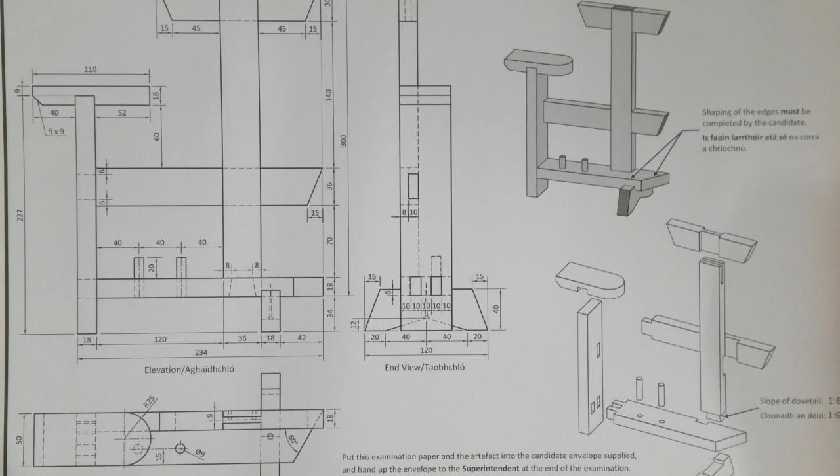Right, so this is the 2023 practical, day 1. You have all your pieces cut out to the spec given by the department. So when you're in the exam, the first thing you need to do is look at your drawing and figure out what's what. What I usually do is label my components: A, B, C, D, E, F, G. Now it's a case of trying to match up your components with the spec from the department.

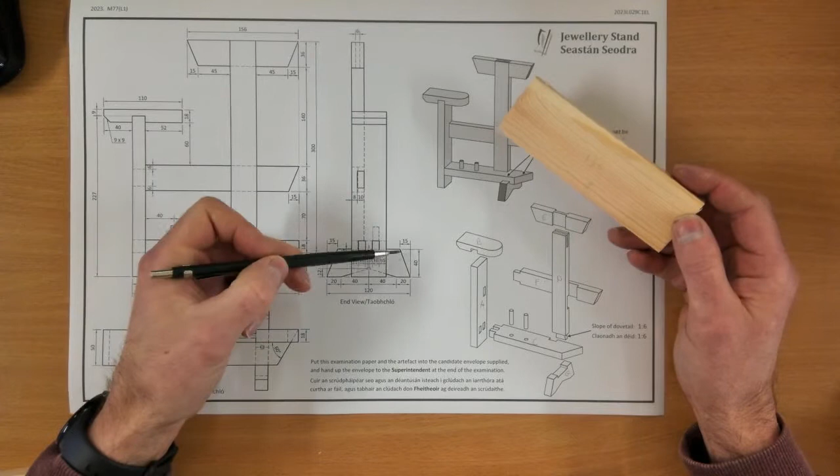So I've got all my pieces. I'm looking at this piece. I've measured and written down what it is - it's 130 wide. I look along my drawing. I know there's 10 mil extra on this than what's on the drawing. Here I've got a piece that's 120 by 40, and this piece is 130 by 40. So that is that bottom piece - I've labeled it G on my drawing, so I'm going to label that G.

That goes to the side. Next piece I'm looking at, I'm going to find this C piece because it sits on top. I know it's as wide as this piece, which means it's 50 wide. So I look at my two pieces that are 50 wide. According to the drawing, this is 234. I've got a piece that's 50 by 245 - I have an extra 10 mil, so this must be it. That's part C, I'll sit it there.

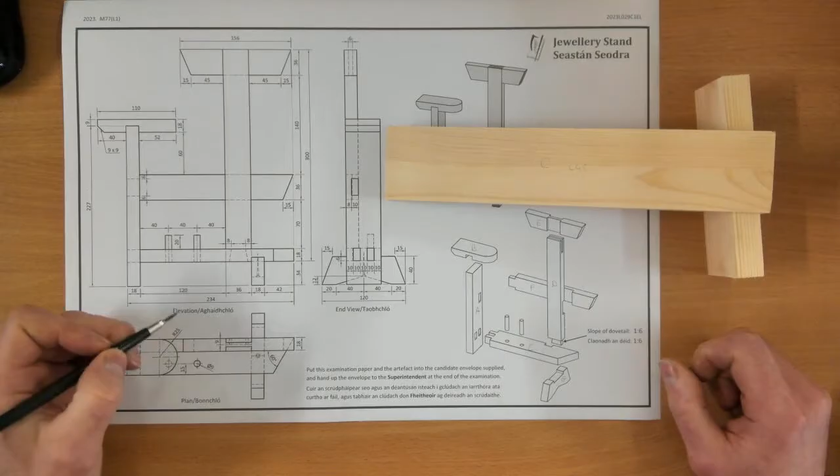I'm looking for A and B now. According to the drawing, A is 227. B is as wide as A, so it's 50 wide. I've only got one piece left that's 50. That means the very long piece I have is going to have to get chopped at some point, and it's going to give me A and B. So that's A plus B - put it to the side.

I've got 3 pieces left. I've got one here that's 245 long, so I'm looking for something around 235. Here I've got this piece, 234 - that must be that one. I've labeled that F, so this is F.

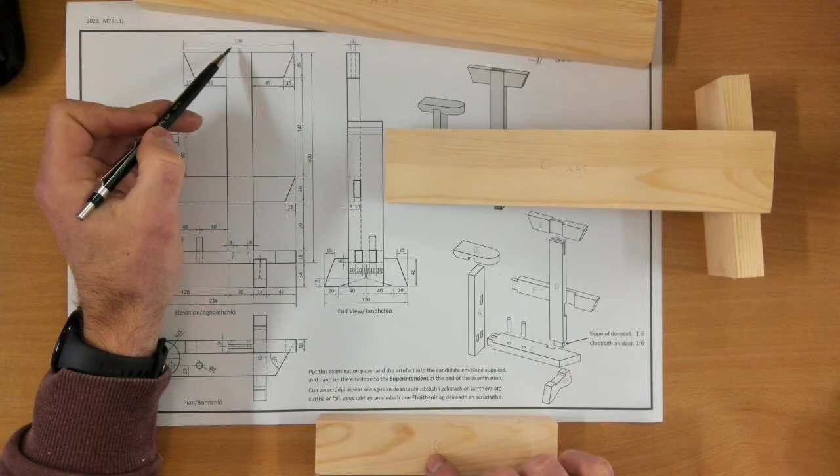2 left. I've got a top piece, 36 wide. This is 36, it's 165 - I'm looking for 156, so that'll do. That's part E. Then I've got a big tall piece that's 310 long. This fella is 300, so that must be that one - that's part D.

So you can set them up on the table in the position they'll be going in - it'll look like that. So I've got all my pieces, I'm pretty sure that's the way it goes together, and I've labeled them correctly. It's a case of picking one now and tackling that.

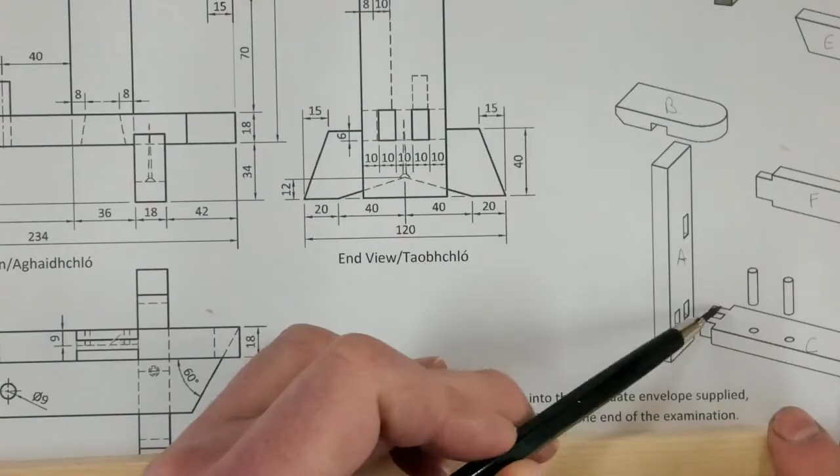I'm going to look at the 50 mil wide pieces first, get them out of the way. So I'm going to say part C. This fella is the elevation, and you can see the plan of it. I know there's going to be 2 mortise tenons, a twin mortise tenon, 2 dowels, dovetail halving, and a slope coming off the end there at 60 degrees according to this.

Because I know there's 10 millimeters extra, I can have 5 millimeters of waste from each side. I'm happy enough that this is a nice clean piece with no knots. I'm going to come in my 5 millimeters - that's going to be waste. I'm going to bring 0 to there, and mark in my depths.

So looking at my drawing, from the end here, I've got the thickness of this piece, which is 18 mil. So with a sharp pencil now, I'm marking my 18 mil. From there, I've got two dowels, so 40, 40, and then 40.

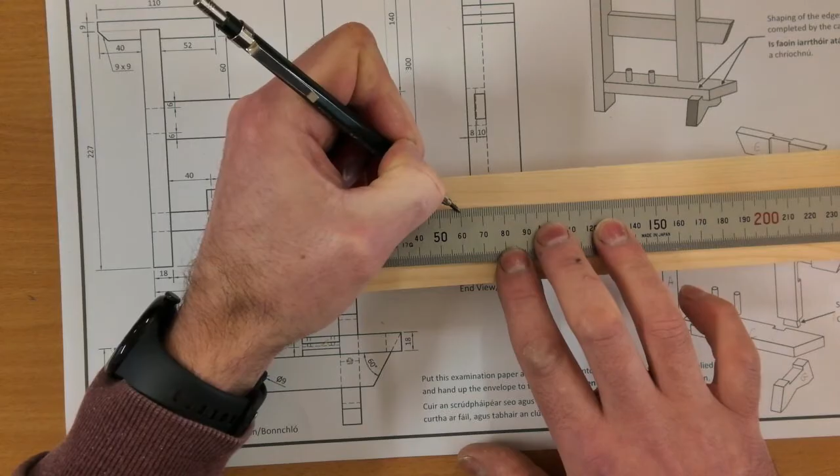From there, I don't want to move 0 on my ruler because, well, you could, but you might run the risk of not being as accurate. So I'm going to count 10, 20, 30, 40, and then come back 2 - that's 40. I'll go back to my 60, I know I have to take off 2. So 10, 20, 30, 40, come back 2. And then 10, 20, 30, 40, come back 2. That brings me to this point here.

I'm going to ignore the 8 and the 8 for a minute - ignore that and that for the moment. Thickness of this fella is 36. So I'm actually just going to move the ruler this time, make sure I'm nice and accurate and everything lines up accordingly. I'm going to measure 36.

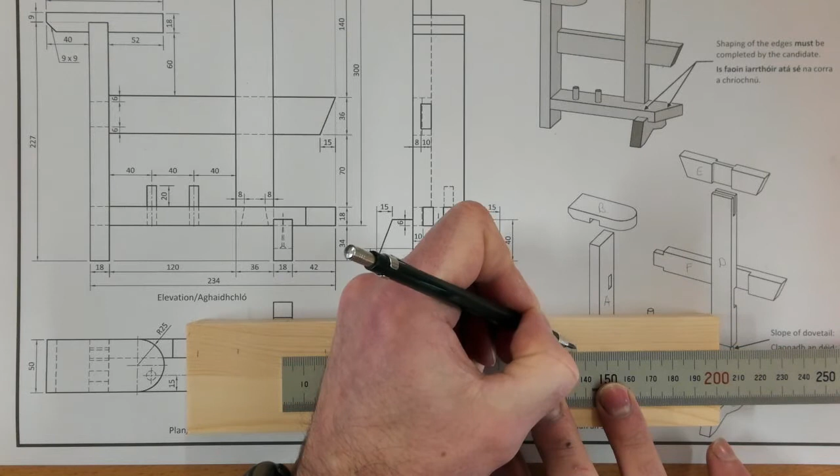Okay, then I've got the position of that base going to sit in there. That's 18 mil. Look, it'll just be easier to move the ruler, but make sure everything's sharp pencil and accurate. 18 mil. Okay, and then after the 18, I should have 42 left over and then an extra 5 mil of waste.

So 42, 10, 20, 30, 40, 42, and then I've got my 5 mil left over at the end. So I'm happy enough that I've got 5 mil at each end. If it turned out that I didn't have 5 mil at each end, It means you've made a mistake somewhere. So I'm going to square those lines around.

Now for the dowel ones here, I only really need them on the face, so I won't be squaring those ones. But the others, I will be squaring. Now as I run out of room here, I flip the tri-square so that there's a maximum amount of surface area for the tri-square.

Let's skip those two.

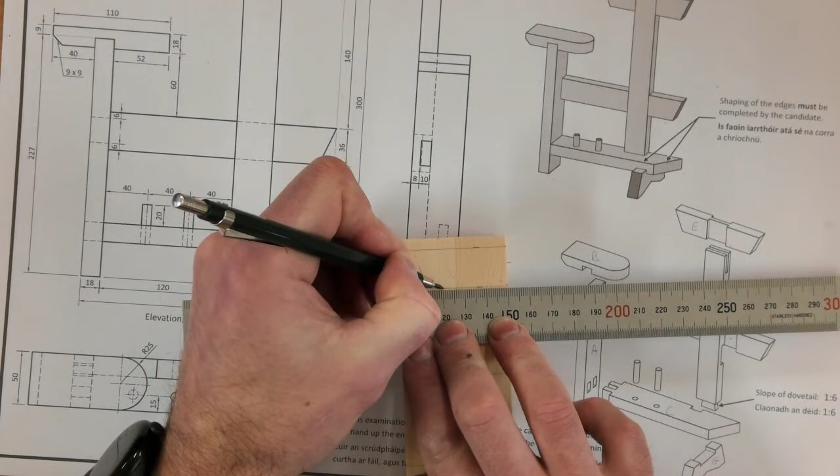If I look at the drawing here, this is the end view. This is looking in from the back, so this is the back, this is the front. It's 10 mils, so 1, 2, 3, 4, 5 tens. So I will mark my piece is 50, 10, 20, 30, 40.

So I'm going to use the marking gauge or the mortise gauge to mark those fellas, so I'm going to leave them alone for a minute.

I'll come to the slopey bit at the front, 60 degrees. So I get my sliding bevel, I get my 60-degree set square, get it at 60 degrees, tighten it, and then double check it's actually 60 degrees. Tighten it up.

And it's going from the back corner, so not the very edge, but it's in the waist, which is the back corner. Mark that fella here, and when I bring it around to mark the back, I'll just flip it like that before I turn it around so I don't mark the wrong side.

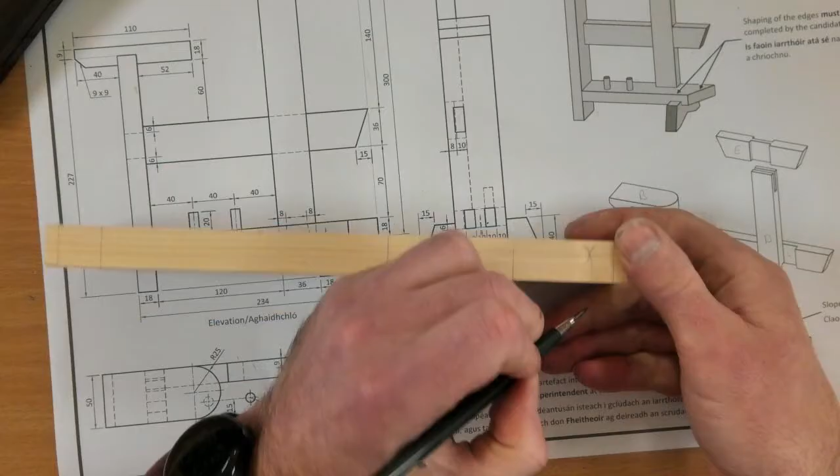I'll put an X there, X, X, X, X, and I can bring that line across to know that that's where it finishes.

Got the dovetail at the back. I know that was 18 on the top side. So this is the top surface, that's the bottom. So on the top, it's in here between the two 36 lines. So I'm measuring my 8 there. So nice and accurately, that's 18 here. And that's 10 to go back to, that's 8 there.

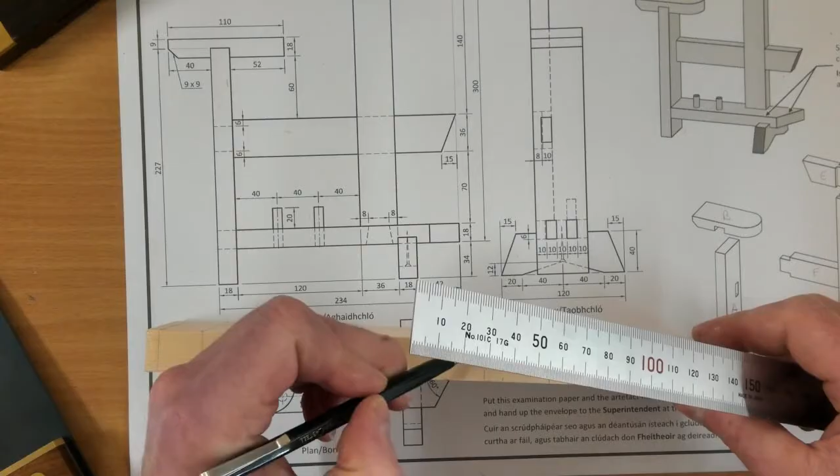Now, I'm not going to the edges because it says on the paper slopes of dovetail of 1 and 6. So when I'm marking part D, which is this guy, I'll come back to that and I'll mark that properly. So for the moment, I'm going to leave part C alone, come back later. I'll stick with the 50mm wide ones.

I'm going to go to A and B. Now, I've got a knot here, so I want to make sure I'm paying attention to that, I don't want to be trying to put those mortises through that knot. So I'll make sure that this end is part B, and ideally this area here maybe, or maybe this back section, yeah, maybe this back section instead.

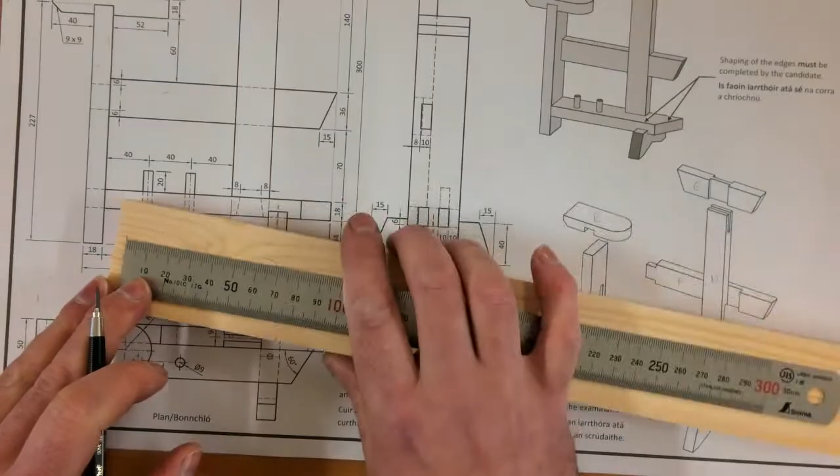So start with this. This is going to be B, this is going to be A. I want 5mm waist. That's my 5mm. I know that part B is 110mm in total, so I'll mark that. So my 0 is here in the 5mm, 110mm.

I'm going to, I should have an extra bit of waist, so I'm going to leave about 6mm of waist there. I should have a 10 I could leave there, but I'm just going to make it 6. So there's an X there, that's all waist.

I'm going to move 0 to that fella. So I've got 233 left. My length that I require is 227.

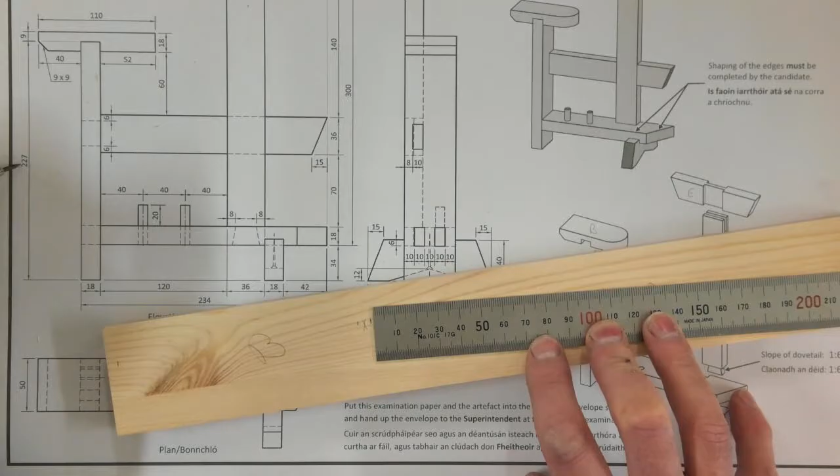From this point, 227, and that leaves me about 6mm waist here. So it's very important that you only leave 5 or 6mm here to account for the 5 or 6 at the very end. Part A.

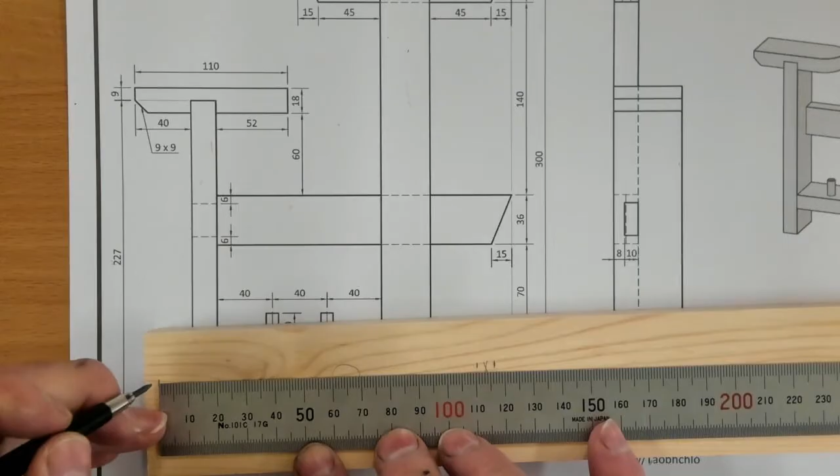Okay, back to part B. I know that it is 40, then the thickness is 18, and then 52. So 0 back down here to where my waist was. Make sure you're ending on 110.

I've got a 9x9 chamfer, so I can put that in now as well. But going back to the end, I've got 40, so still at 0. Measure my 40. Thickness is 18.

It's very important that you get that 18 spot on, because if you made it 19, well, when you do the housing joint that's here, it'll be loose. So make sure it's exactly 18. So that's 20, and come back 2 is 18.

And then from there, I'm going 52. So there's my 2. And then 10, 20, 30, 40, 50. That brings me to the end. So that's a handy enough one. Square those lines around.

I'm going to mark that chamfer on the bottom because it's on the underside here. So I'll bring a light line to the front. Let's bring the waist around.

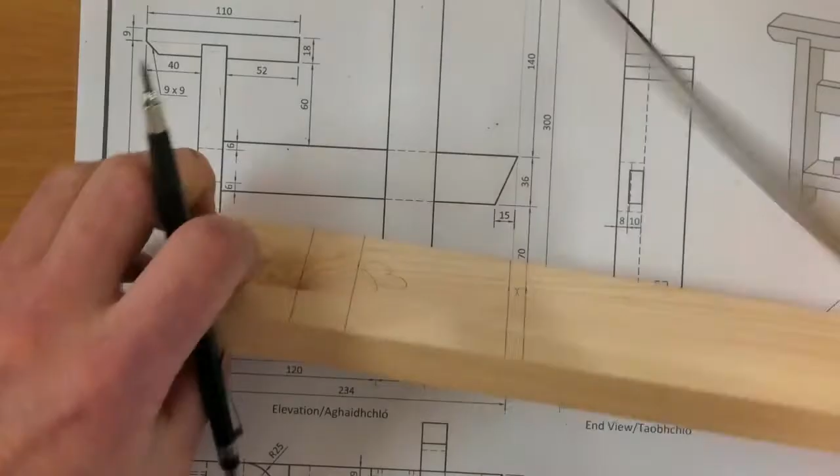And bring that line for the chamfer. You could mark your 9mm at the bottom, it doesn't matter. So I'm interested in that line, so that's the chamfer.

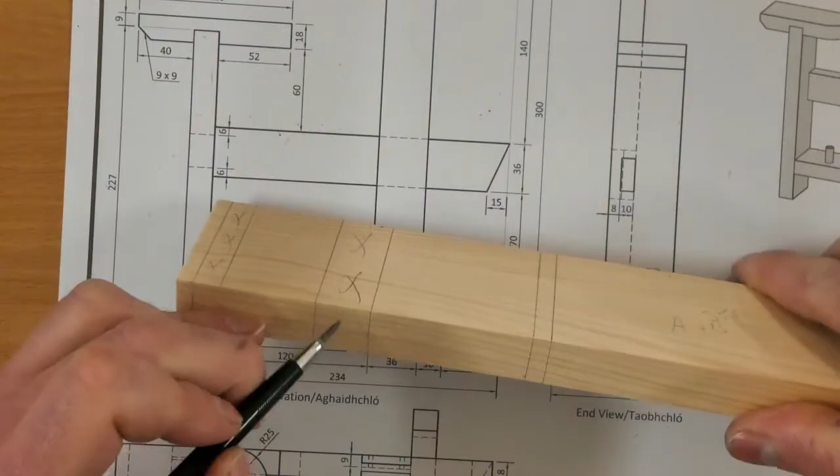My housing joint, is it? It'll be knocked off this. So I have a decision to make here now. I might keep that knot on the top or the bottom, but if I'm going to be processing this, I don't want it near the knot, so I'll make sure the knot is down, or the housing joint there is at the bottom. I'll have to mark a line here later with a gauge, but at least I know I'm taking the bottom off. This is all waste, so that's X's.

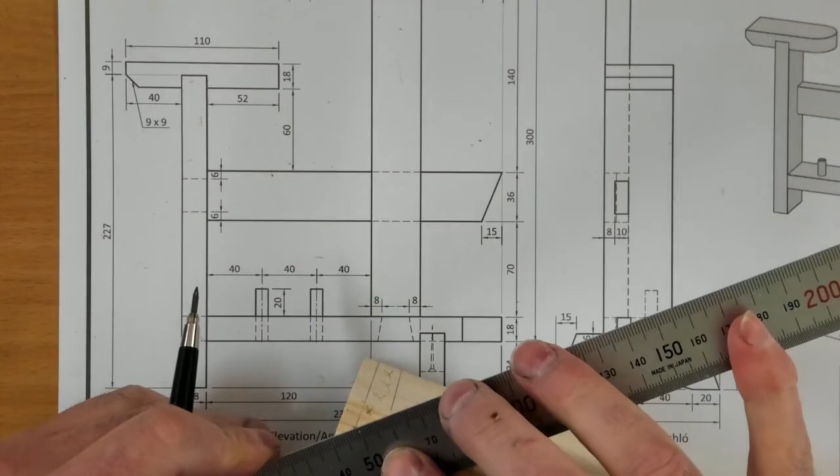And so it's going that way. This is the chamfer, on the underside, so if something happening there and there. Measure 9mm up. 9 is there. So I'll have a 45 degree here. So that'll be the chamfer coming off. Measuring 9mm in this way. So that's 9 there. I'll join my angle.

So that's part B. Enough done for the moment. I'll come back and mark the housing later. Part A.

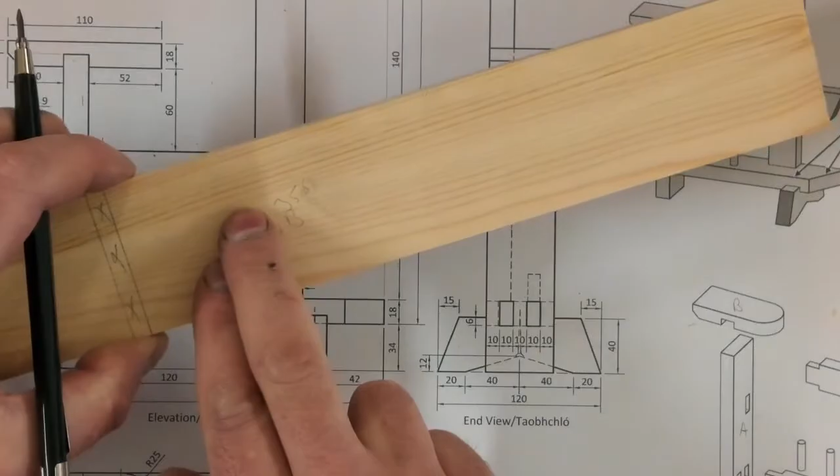Part A is the long one. I've got a double mortise here and then a mortise here. So I'd like to make the mortise here, and there's less of a chance of it splitting. You could put it at this end, that will give you more to hold, but I'll put it on this end.

Another decision you could make is, there's a nice clean saw cut here, and it might be worth leaving that as a saw cut from the machine, so that this is nice and clean to go into your housing joint up here. So I might ignore that mark I made earlier and measure from right to left, making that the very top. So this is the very top. That way I don't have to try and make this edge nice and clean later.

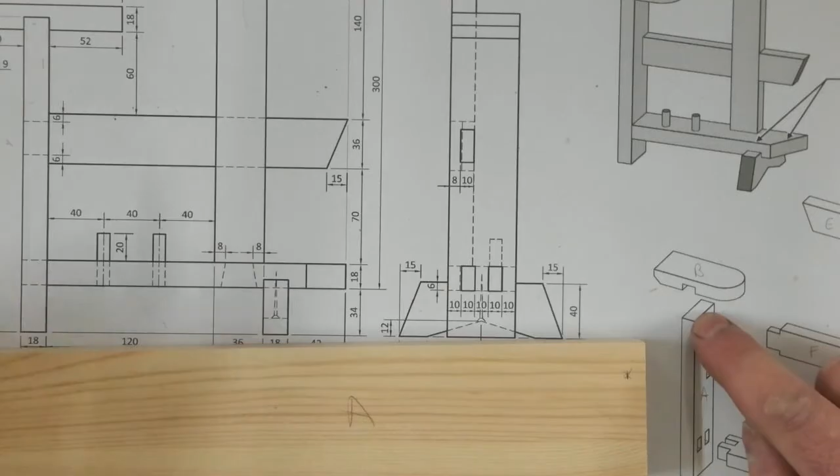Okay. So we'll mark that again. 227. This time I'm going to go from the very edge of the wood. So 227. All that means is this waste is going to be wider now.

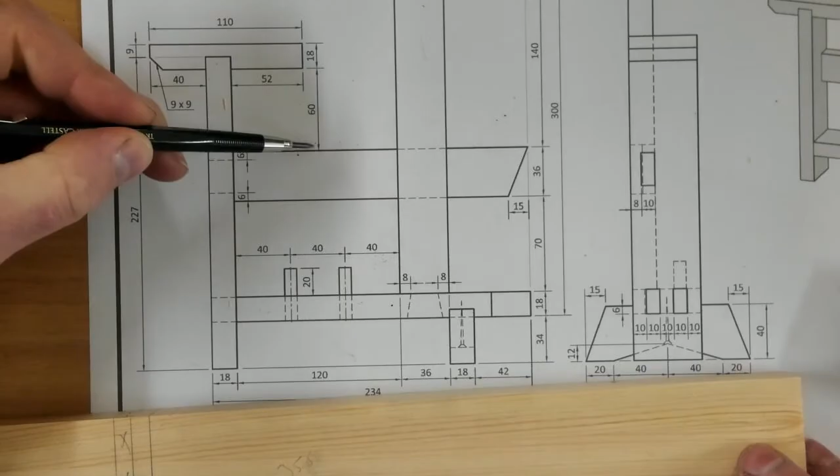Okay, so this is the top. There's your top. I need to come down to this point. It's 60 there, but I've got 9mm here.

I might be better off marking from the bottom up. So that's from the bottom up: 34, 18, 70, 36. So I said that this point is here now, is the bottom. So line it up. I'm going to say 34 plus 18. So 34, 18. Here, I'm just going to move instead of adding, and try to be as accurate as possible.

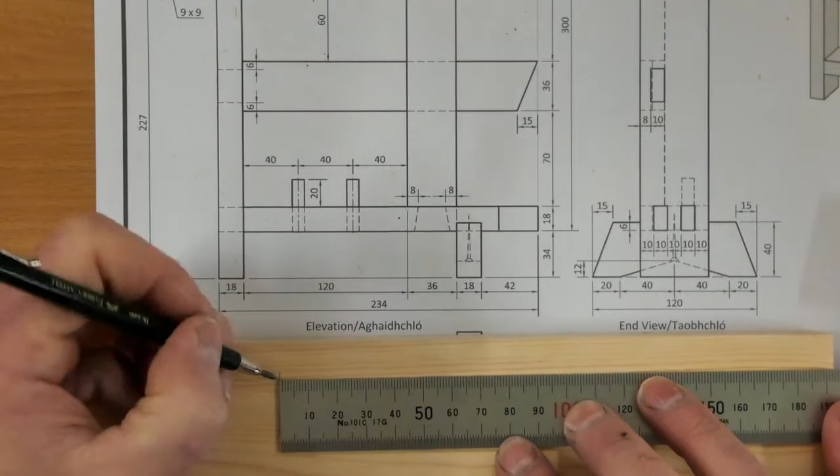18. After that, I got 70. 70. Then I've got 36 again: 10, 20, 30, and 6. I've got 60 plus halfway into this is 9. I should have 69 left over. I'll just double check that. Yes, I have 69 left over here, so I know that these are correct.

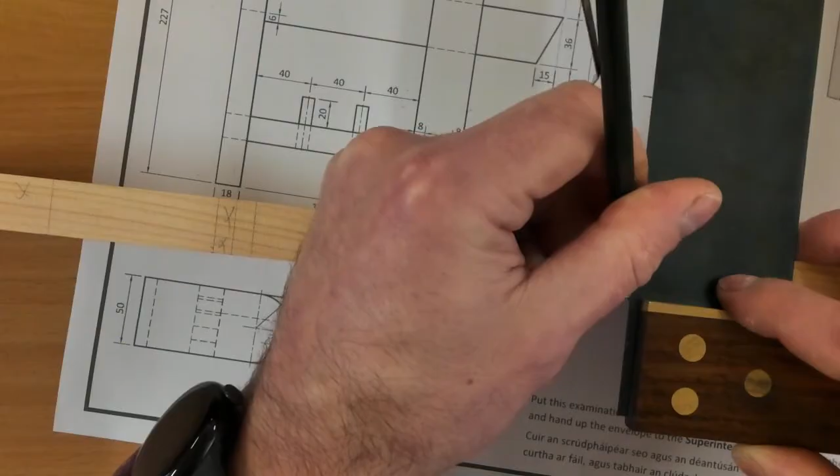Let's square those points around. Again, it's very important that your pencil is still sharp, because even if you're a mil or a half a mil out, it's going to cost you later on.

So my mortise is going to be down there. I could mark my tens here, but I'm going to use a gauge instead. So I'm just going to write in there 'mortise', so I don't forget it. After that gap, I've got my mortise up here. So that is 8 in and then 10.

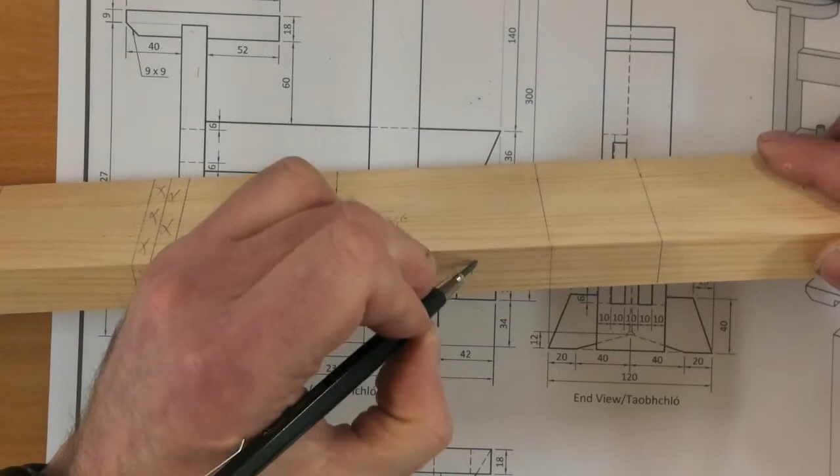I can mark that, but I have to decide which is my front and my back. So I'm going to say this is my front. Okay, so the front. That means this is the back, so I'll be measuring in here. So be nice and accurate from the back edge, which is here. I'm going to come in 8 and then 10, which is 18 in total. So I'm just going to put an X there, so that's my mortise, but I'll mark these with my gauge soon. And there's nothing happening up at the top, and that's a nice clean cut.

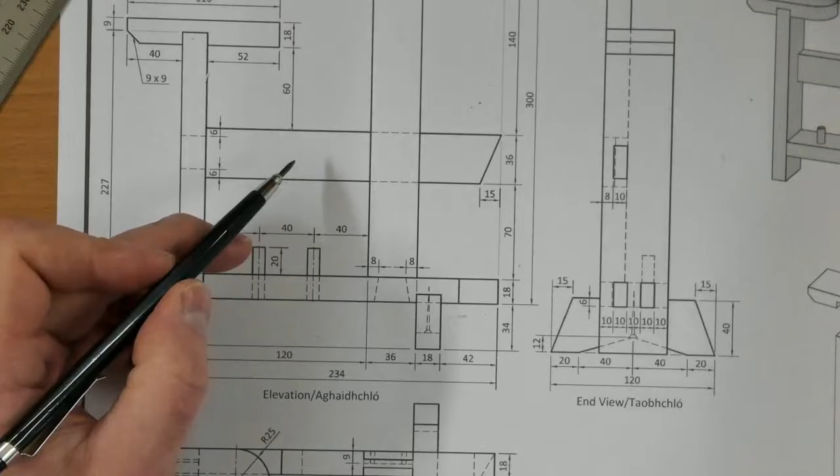So that's A for the moment. We'll move on to these two. So sure, we'll start with part F. Find part F. There we go. I want to make sure I have a bit sticking out at the end here. So that's 5mm, I'll be coming in, make sure I come in. So that's my 5. I bring 0 to that point.

Now we've got 40, 40, 40 is 120. So I've got my 18 first. So 18. I'm just going to move. I can move 0 there, or I like to bring the 100 down. Make sure it is nice and accurate. 40, 40, 40 is 120. So 100 and 120. From there, I've got 36mm. So 10, 20, 30, and 6.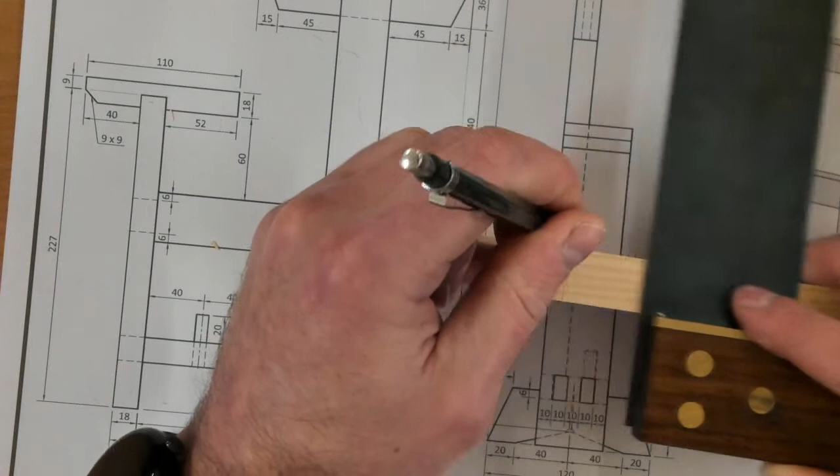So double check they all line up as you come back around. Just going to write down, because I know this is my left, this is my right, and this is the front. Okay, this is my 15 in, and then he joins back at an angle.

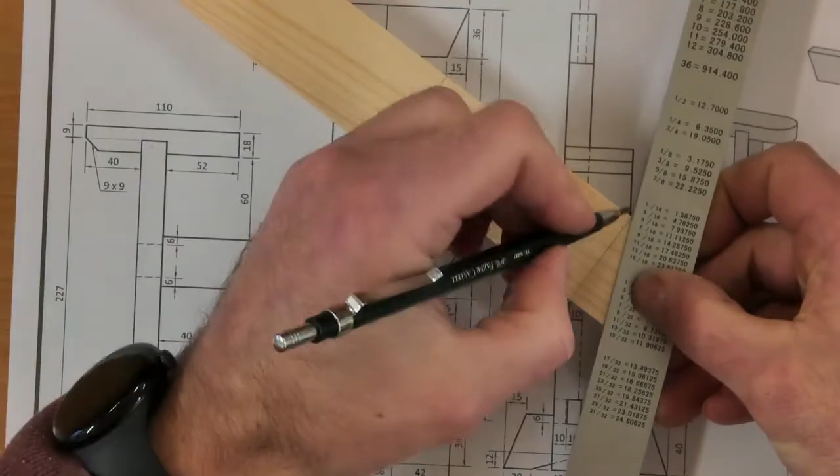And when I go over, make sure that I'm joining my angle back in this direction. That's waste. Okay, then I've got my halving joint here, or no, yeah, my halving joint. So I'll mark him with a gauge, I'll leave him alone.

Over here then I've got my mortise and tenon, so this is going to be my tenon. I'll be coming in 6 and 6, so I can mark my dots for that. So in 6 here, and I'm coming in 6 here.

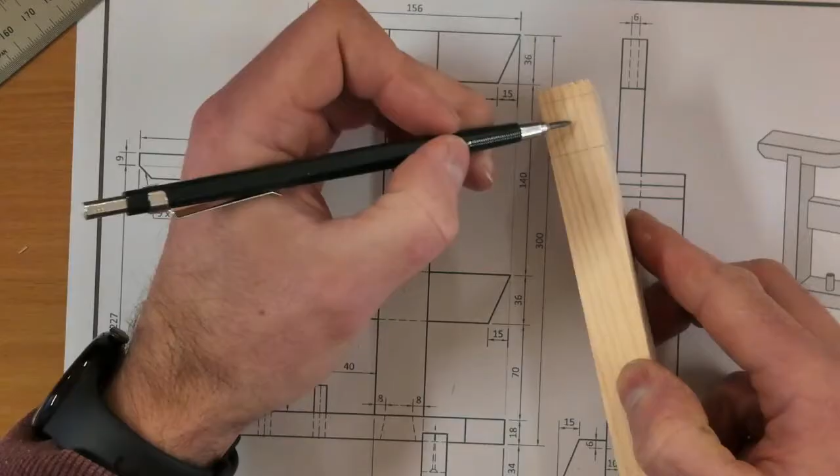So there'll be waste there and there and there, on the edge here, and this side. And not all of that will be waste, so I have to decide now. If we look at this drawing, the front of this is kept, the back of it is not. So I'm keeping this section here, but I'm getting rid of this back section. So I'll have a line here, so maybe that X should be at the back.

And this side here, so I know I'm keeping this area. That'll make more sense soon. Right, that's part F done for the moment.

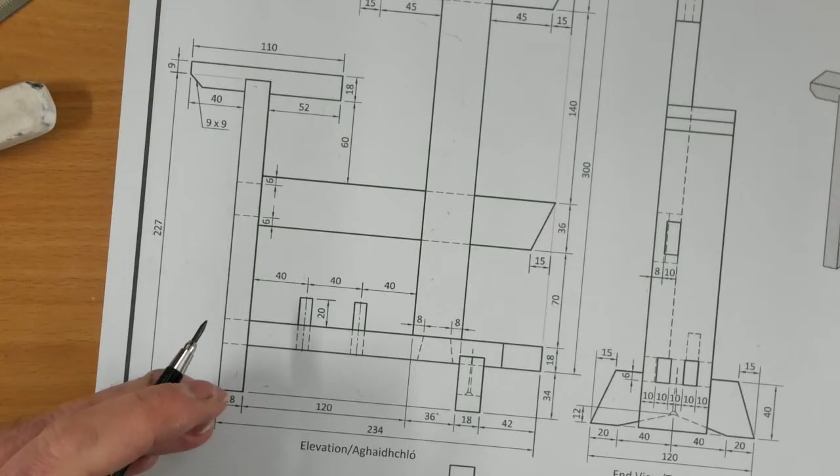We'll move on to part E, which is the top fella. This top one here. So come in our 5mm again.

Move 0 to that point. I've got a 15, 45, so that's 5, 10, 20, 30, 40. Got 36, 10, 20, 30, 5 and 1 is 6.

Got another 45, so I'm going to place my 100 there at the last point exactly. 10, 20, 30, 40 and 5. And 5 and 10 is 15. Left with 5mm at the end. Square those around.

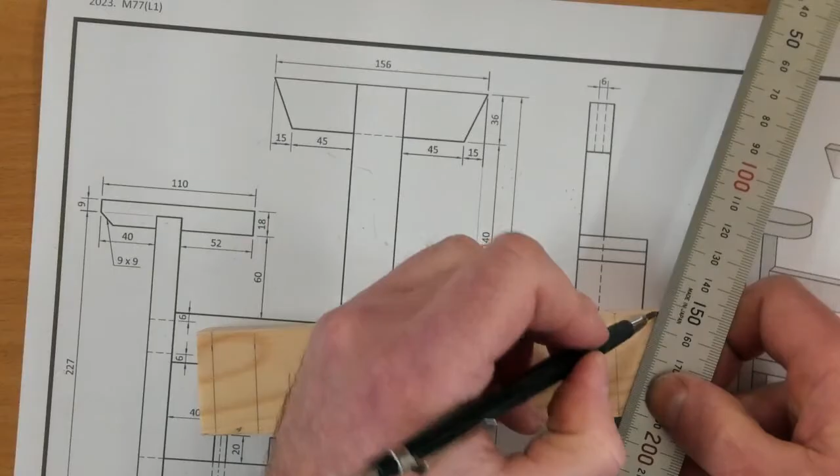Okay, that's where I had it. It's the front. This is the left and right. Got a 15 mil or 15 mil, yeah, angle here. Mark that fella there. And this is the opposite side.

Waste. Go to the other end, which is this guy. 15 mil here. Waste, waste, waste.

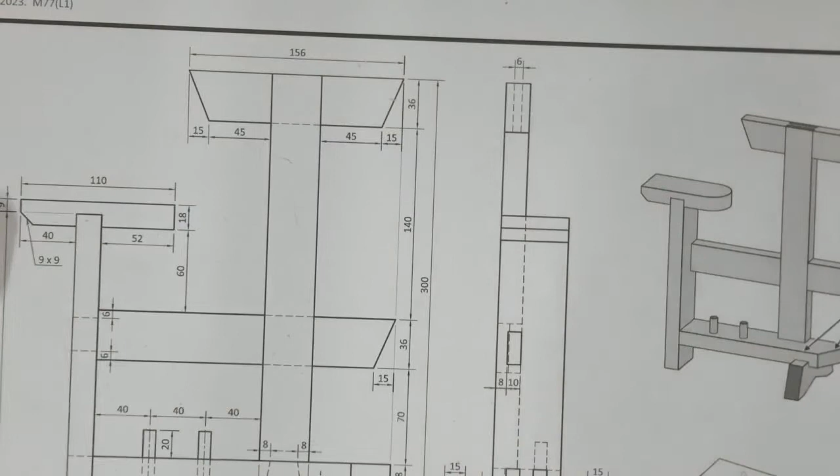And this is going to be a bridle joint. So I'll be taking out this front and back, leaving a middle. I'll use a mortise gauge for that. So I can leave that alone for the moment and grab part D.

So this is part D. It's going to be vertical like this. So we'll mark our waste in the end, so we'll say the bottom, top, and we'll call this the front.

Mark in our 5 mil. I'm going to move 0 to there. Now I'm coming up. What have we got? From the end, got 18, 70, 36, 140, and then left with 36.

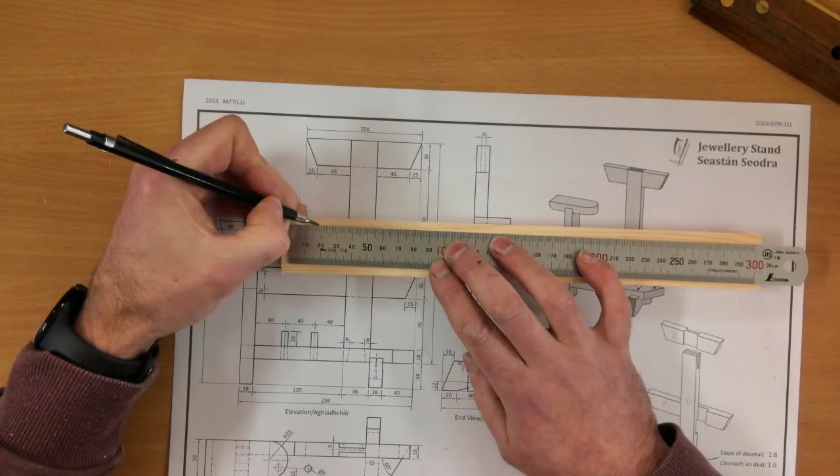So 18, 18, then 70. So 70 plus 18 is 88. I'm just going to move 0 now. So from there, 36.

After the 36, we had 140. 140, double check that didn't move. 140. Then I got 36, so 10, 20, 30, and 6.

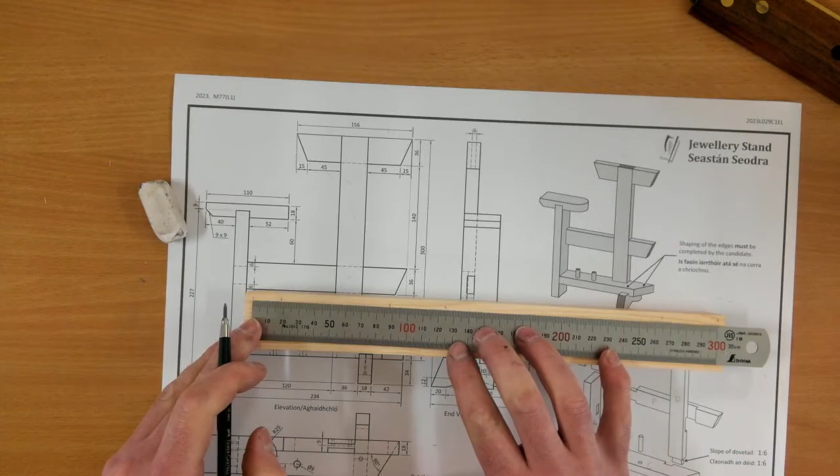Now I've got a bit less left over. I'm going to double check these measurements because it doesn't look like 5 or 6 at the end. So 18, 18, 70, 70, and that's 36. Yeah, this one is a bit extra.

So this one was supposed to be 140. I'll have a half a millimeter out. Okay, that looks fine then. Square those around.

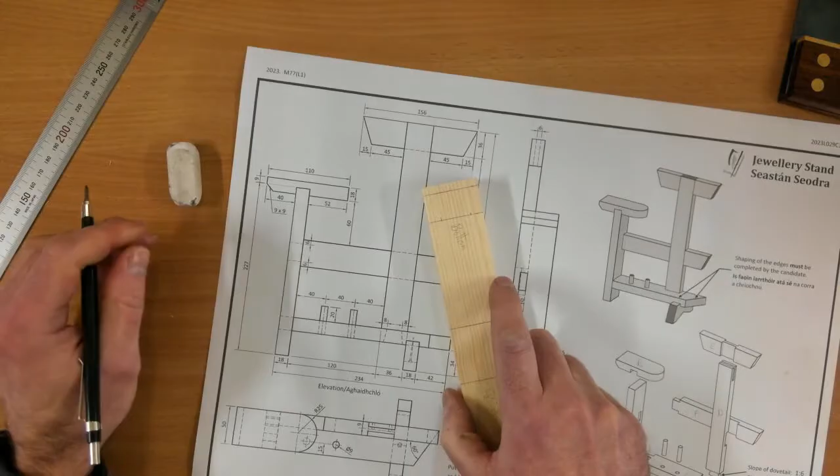I might as well do it on both sides just to be safe. Okay. Then I have this fella, I'll need, that's a halving joint, so I need my marking gauge for that. And then I need the gauge for the bridle at the top.

Okay, so everything else is kind of marked. So I just need the gauges now. I'll start with the easy one, marking gauge. So I have a couple of places I need to do this. So setting it to halfway, I'm going to guess halfway.

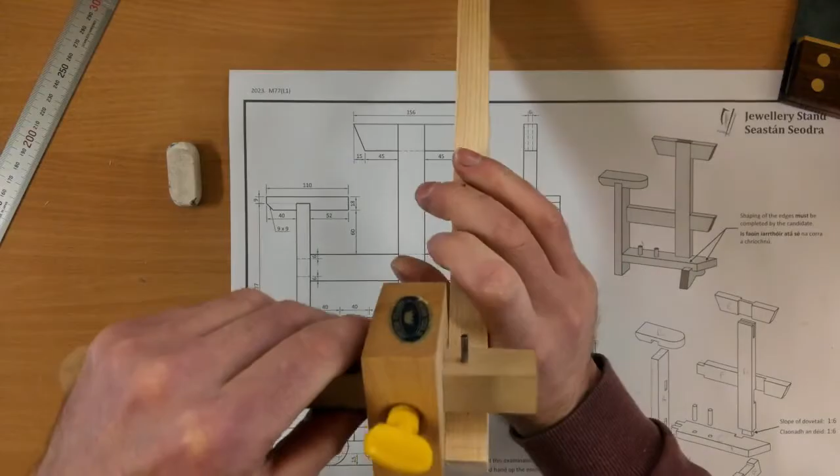So I loosened it, set it roughly halfway, tighten it. I'm going to put a pinhole in one end, turn it around, put a pinhole. If the two pinholes line up, it's halfway. If it's not, you need to split the difference between those two pins. Tighten it again, double check. Still not happy with that.

Okay, that'll work. So I need it down here for this dovetail here, it's a halving, dovetail halving. So I'll say I'm coming in from the back, and then I'll be coming in from the back on the other piece.

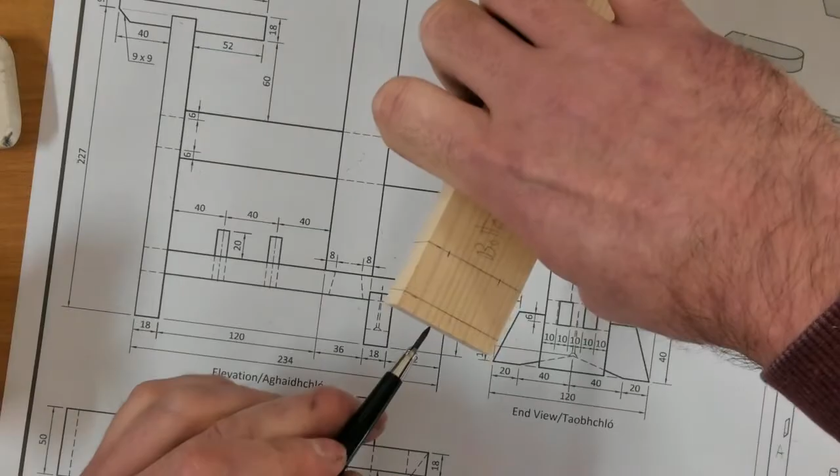So run it up along, scratch across the top, come up from the end. Straight away, I'm going to mark where the waste is. I'm keeping the back of this, so I'm getting rid of the front of it. As you can see here from the drawing, you're getting rid of the front, keeping the back. So I have an X there, that's an X, that's an X, down the end there, X is there.

Okay, I need to mark a halving here. So I mark from the back here, so I mark from the back again. So this is my back in between these two lines. So pinhole at the bottom one, move it up, light scratch. And when I turn it, I'm turning it this way. So I'm coming in from the same back side. Pinhole, bottom line, come up to the next one, slide it to jump into the hole.

And we consult our drawing and we say on part D, I'm getting rid of the back of it. So I said that was the front, this is the back, so my X is going to be here. That's all got to go.

Place it down again. I've got a bridle joint at the top. Can't use the same gauge. So I'm moving on.

Did I miss a part? I missed part G, so I'll come back to that soon. We'll use the gauge first.

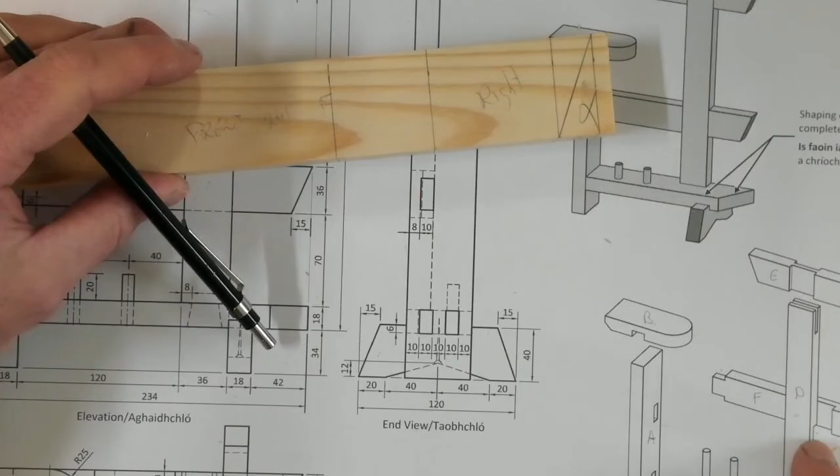Now part E is a bridle joint, skip him for the moment. This is F, F has got that fella here. So I came from the back on the other fella, so I'm going to come from the back again.

So this is the opposite side of that halving joint. Okay, and if I got rid of the back the last time, I'm getting rid of the front of this fella.

Now still on F, got another halving here for that mortise or that tenon. So measure from the back, cut it from the back, up there, and along there, and come up the back. So there's my scratch lines. I've already got my X's. I'll put an X up here, maybe heavy in that line.

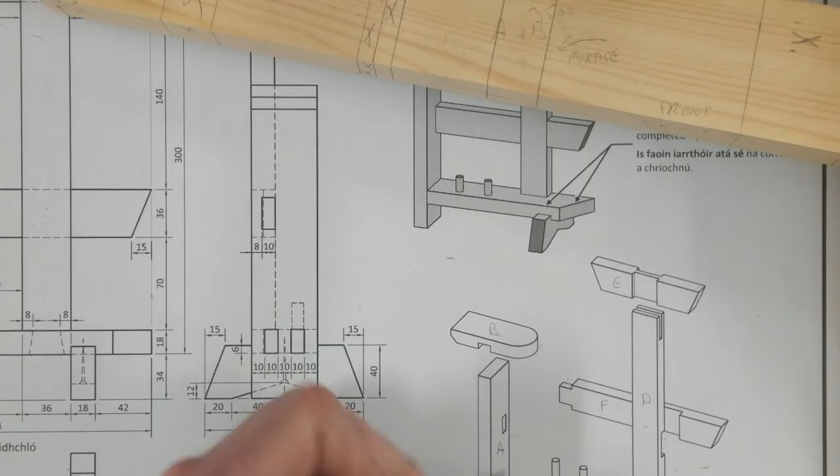Okay, he's sorted there, that's part F, the marking gauge. This is A and B, so we'll go look at A and B. No, don't need the gauge for A or B.

And then this is C, down C, I need a gauge here for this fella. So just a light scratch there, and here. So that's the depth I'm cutting to that dovetail.

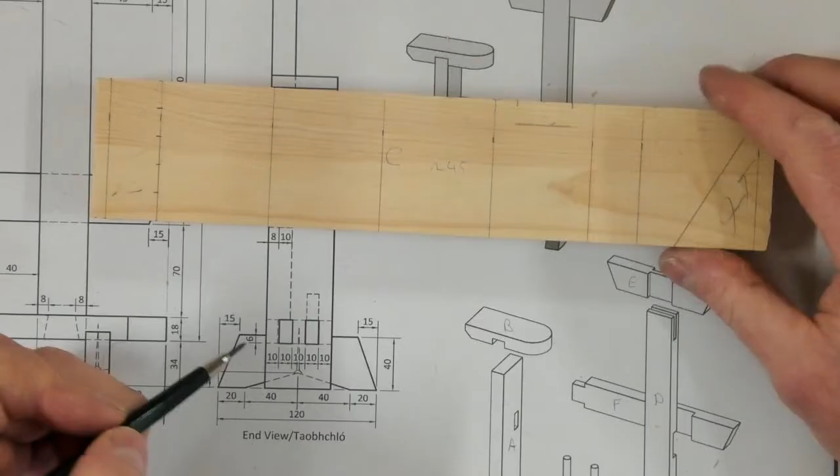Anything else on C? No, the rest is a gauge, the mortise gauge. Right, we'll come back and look at the mortise gauge.

Our mortises are, we've got two different settings. We've got a bridle joint, which is 6 mil, and then we have the mortises up here, which are 10 mil. So we'll set the gauge to 6 mil first, so the needles should be fairly tight together there.

We get part D and E. So this is E, we want to center the gauge, so again, roughly get it halfway. Two pinholes in from one side, flip it around. If it goes into the same two holes, spot on. If not, split the difference, double check it. Happy with that.

It's time to mark it, so double check on part E, definitely have E in my hand. Okay, so I'm marking from the front. So I mark from the front on this guy, make sure you mark from the front on the next one. So I'm getting rid of the outside, so my X's are on the outside here. Okay, so those are my lines.

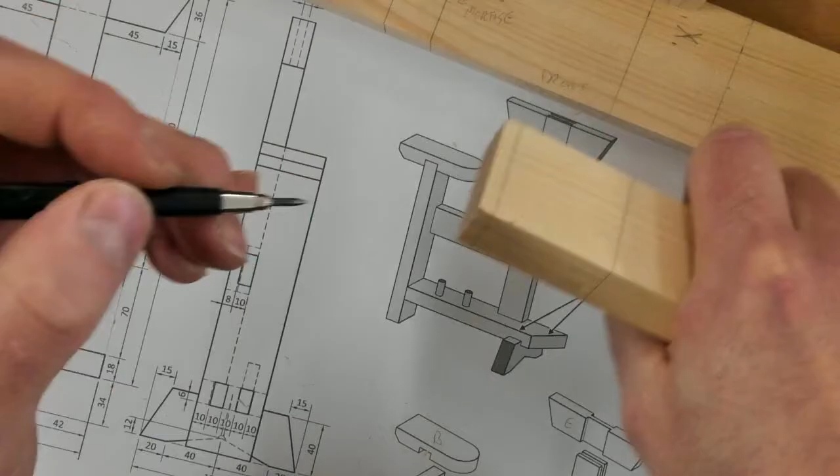And then down this side, highlight that and that, highlight across there, and highlight him. Get rid of the inside of this guy, and my X's are on the inside.

Let's handle them with the mortise. I now want to change gauges. Is there any other one now? On part A, got him.

That gauge is set to half the material width. And this gauge at the minute, so that should be, if it's 18 mil thickness, that's 9 mil. So I need to change it to 8 millimeters for this, which is that joint.

Now, if you remember, I marked it earlier. This is part A, I marked the 8 in, double check that. 8, and then we had 10. So I'm going to loosen the gauge and set the gauge to that pencil mark. Tighten it and double check it. A small bit more. Okay, and mark that fella.

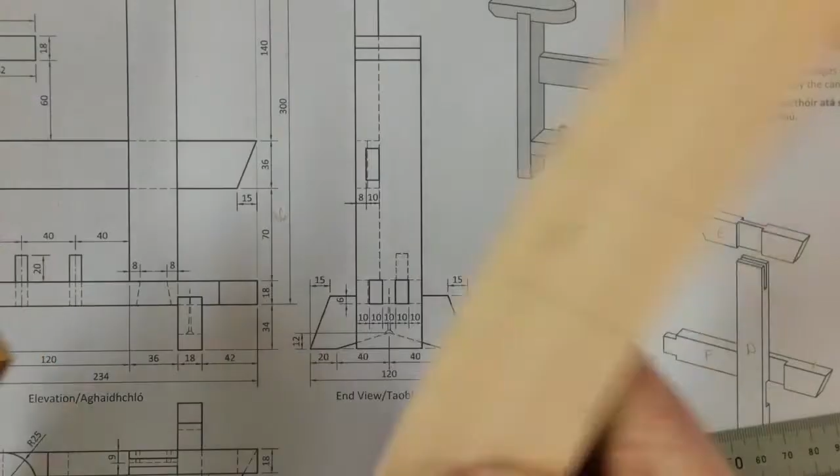That's that. And now I want to get the extra 10, the 18 altogether.

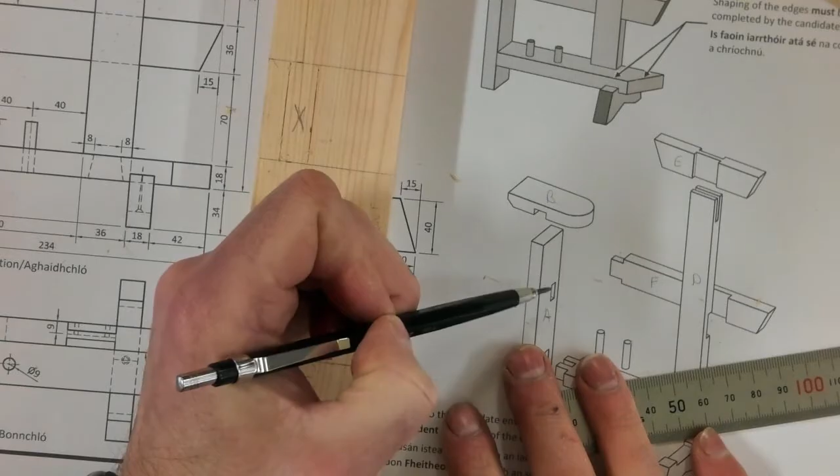Now, small mistake - I scratched too much off here, because if you look, the shoulders have been taken off this. So that isn't the width of that, it's only the width of this bit.

If you remember, if we look at part F, there's your F. We came in how much was it? 6 mil from each end. So over here, I need to come in 6 mil here, and from this end, I should be coming in 6 mil here.

So it's this small rectangle, not the big wide one that I'm taking out.

Okay, now anything else that needs an 18 mil on a gauge? Don't think so. Have I done part F?

Have. So the other thing I want to mark is I want to change the gauge to 6 millimeters now, which is on part F, that line I marked.

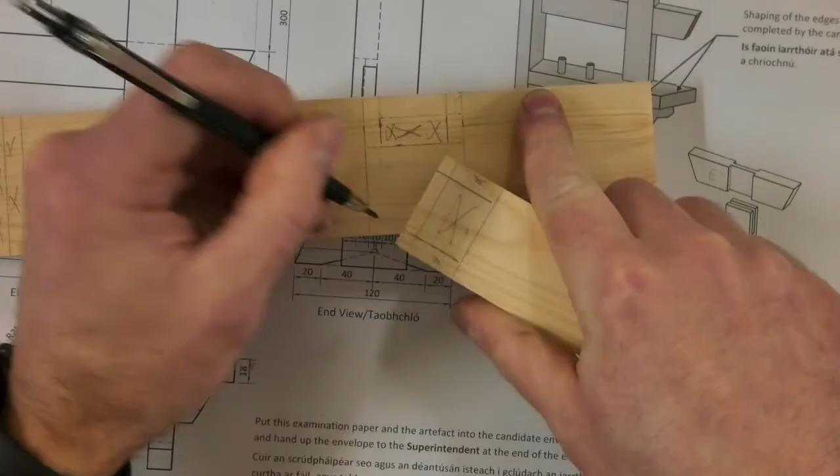And on the end, I've already X'd that, so add the X's here and here. Okay, so that fella there needs to go into that fella, so they should line up, and they do.

Okay, we'll have a look at - there's one thing I missed. It's this fella here in part B. So that's when I had him set to halfway. I'll go back to one of my other halving joints, and I'll reset the needle to match up.

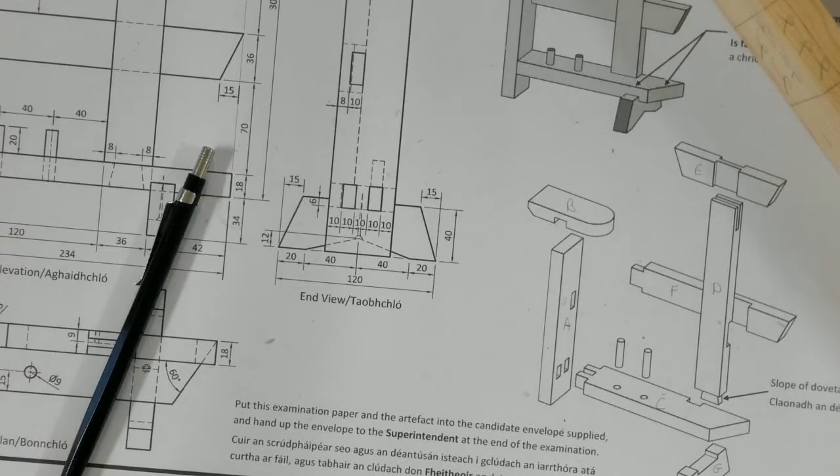Double check it. So I'm fairly sure that he's matching up with that fella from earlier. So time to get part B back out. Find B. Oh yeah, B was on A, wasn't it? So this guy here, I got my X's to indicate what my waste is.

So pinhole, scratch that, flip it over, coming in from the same side. So that's the depth of the housing. Okay.

So for these tenons here and for these mortises, we'll mark these at the exact same time. So we've got one of them marked out on part - which part was that? C.

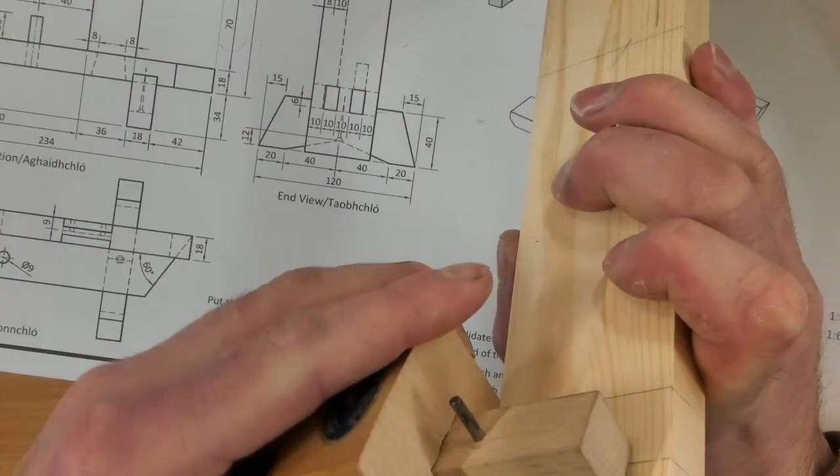I marked the tens, so I changed this to match up with that dot I marked that was 10 mil in. Tighten him. So that's a tenon, so I'm going to scratch him across the top and down. I'm going to do the same thing over here because it's symmetrical.

It's 10 mil in here, so why not. While he's set to 10, I'll go get part A, and it's in between these two lines, and I'm going to scratch the 10 mil on both sides of this. Flip them.

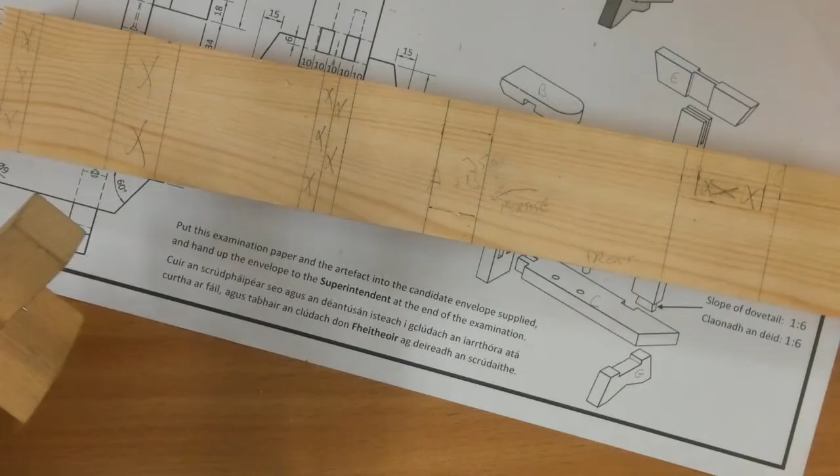Now I can guarantee that they will match up with the other guy. So go to my 20, which is the next dot. Double check it, happy with that. Scratch that over the end. Do the same on the other side.

Now, it's very important that you do this with a gauge, because you can guarantee that your mortises and tenons will match up. If you did it with pencil, there's a chance you'll be out. So mark that fella on A, this fella, do the other side.

Now I'll mark the waste, so an X there, an X there, X here, and an X here. Straight away, I'll come over, I'll do the opposites, so outsides and middle, outsides and middle. Do the top as well, because that's the side you'll be looking at when you're cutting. Okay, so that is done.

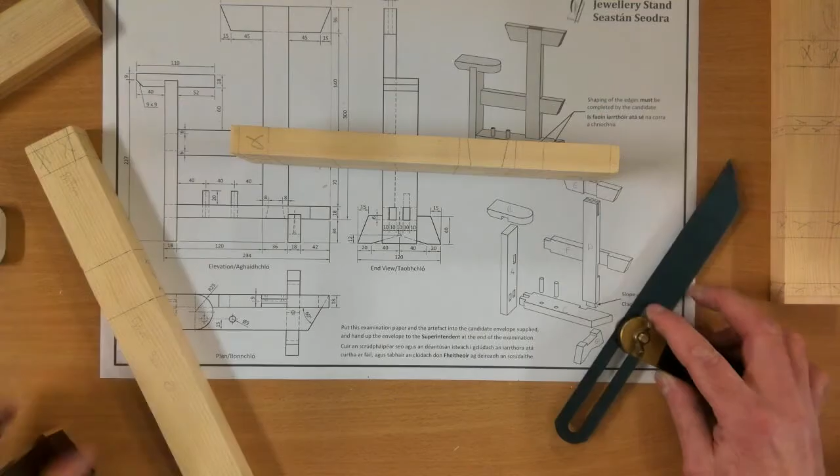Get my tri-square now. That up to that line. That up to that line. Go around to the back. So that is now waste as well.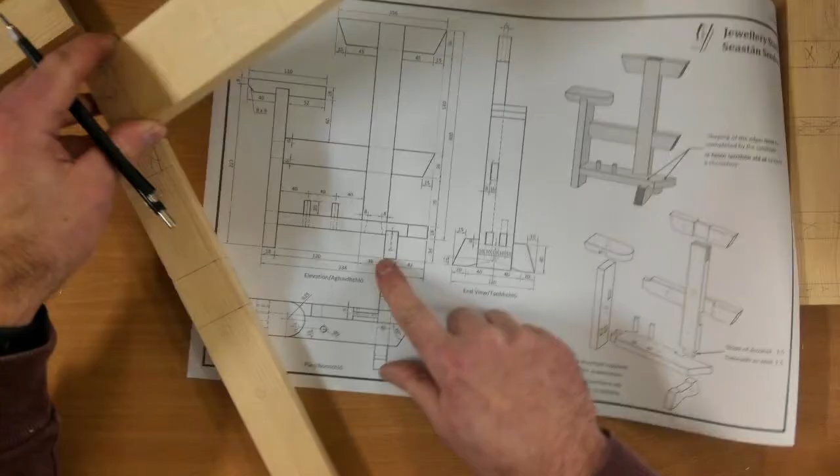Now, do I have everything done apart from G? So we'll have a check. Part C, those holes, I've marked the lines, but I haven't marked the centers. If you look at the plan, it's in 15. So very quickly, I'll come in 15.

So that's the center point. And I'm just going to run a line at the back there. If I don't drill square, I could drill a small bit from each side to force the drill to come out square. So that's the center, center, center, center. Just put a circle so I know what they are.

Otherwise, that is part C. Done and dusted. Part A. Part A, I've got a clean edge, mortises, a gap, got my tenon, nothing else, that's fine.

Part B, housing, chamfer. Oh yeah, I've got a round fella here. He's radius 25. So this is my good edge. Come in 25. Bring that line around.

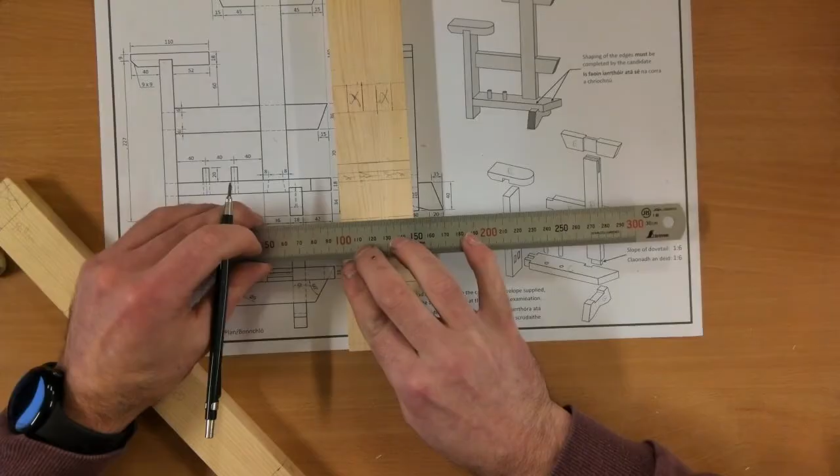Find the center. So 50, half 50 is 25. Center somewhere there. So there. Grab a compass. That'll do.

Okay, so that's part B. It's finished. We've got here part D, that's marked. Bridle's marked. Dovetail is marked at the bottom. That's that done. I have here part F, tenon on this end, halving joint here, slope here.

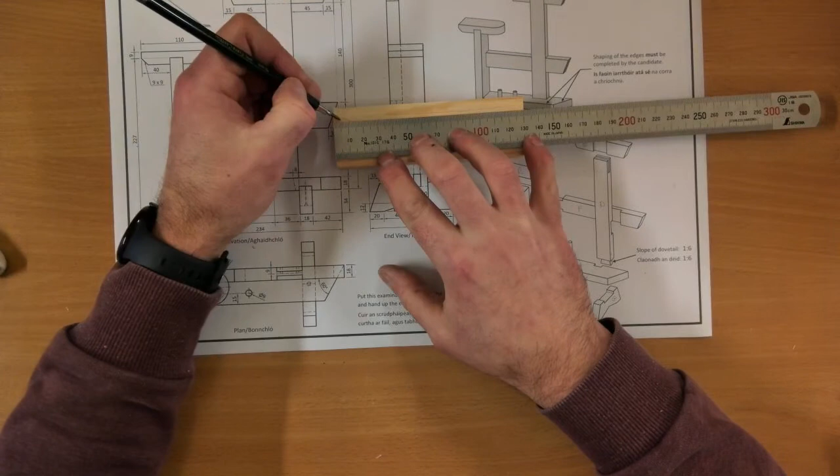That's that one done. Right, leaves me part G. G is the leg that stands at the bottom. Right, 5mm waste anyway. Move 0 in. Got 15. Now, just be careful here now. So this is 0. I've gone 15 because I've got 15 at the top. They also have 20 from the very edge at the bottom, so I have to mark 20 as well.

And from that 20 at the bottom, I've got 40, 40, and 20. So 40, 40, 20. Then from this edge, I'm coming in 15. So 10 and 5 is 15.

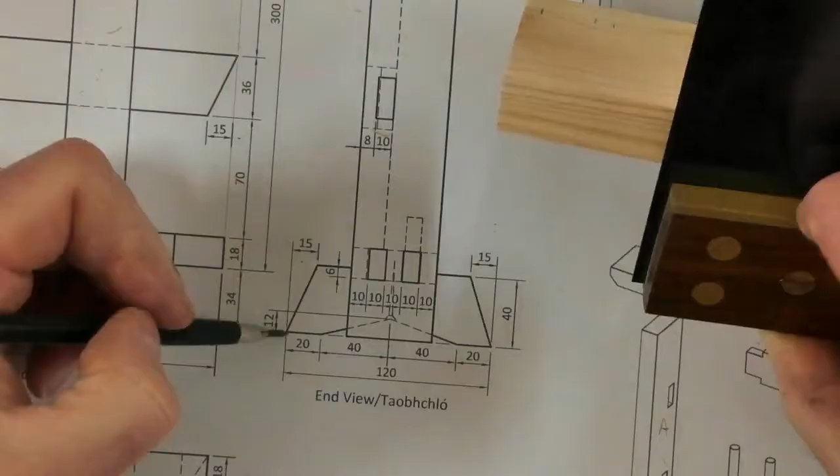Okay. So I'm at the center one first. I don't need that at the top, I only need it at the bottom, so I'll just do it at the bottom. Okay, at the bottom I need that 20, so I actually don't need him up there, I only need him at the bottom. And that 15, I only need him at the top.

Walking around. Got my waste. Got the 20, sorry, the 15 is at the top. And that right now, 15 at the top, and the 20 is at the bottom. 20 is at the bottom. That's right. Square the bottom ones across the base.

Just put a tick here at this edge to know where it ends. This end, tick here. You've got 15 at the top to go across the top. Across the top, bring my waste around. Waste on this end as well.

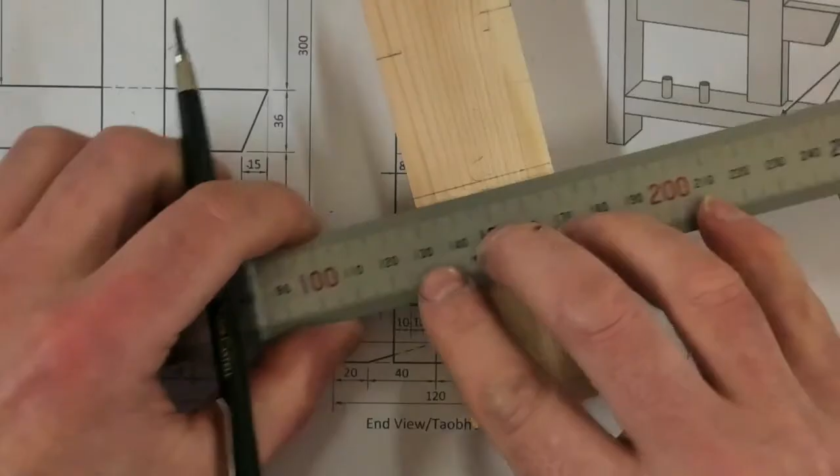Okay, I'm coming up 12 at the bottom and joining back a slope. This is the bottom, so I'm coming up 12 in the middle. And join a slope. Do that on the inside as well, or the opposite side. So coming up 12, join as a slope.

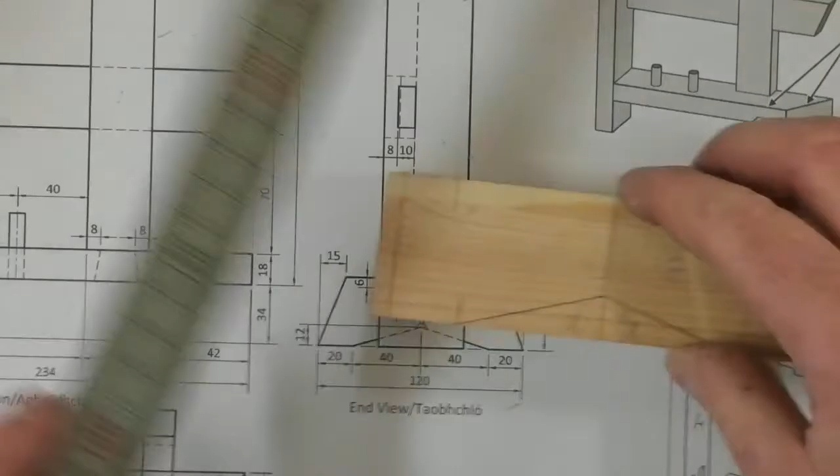Okay, well that's waste. Got an angle cut up to the 15. Okay. Both sides.

There's waste. Then at the top I've got a trench. It's 50 wide, so I'm going to go to the center line. I'll go 25 to the left, 25 to the right. Take that line across.

Down a bit. Same here. Then this is 6 mil of depth. Go back and set this to 6 again. Just set it on the ruler. Double check. About 6, and scratch that line.

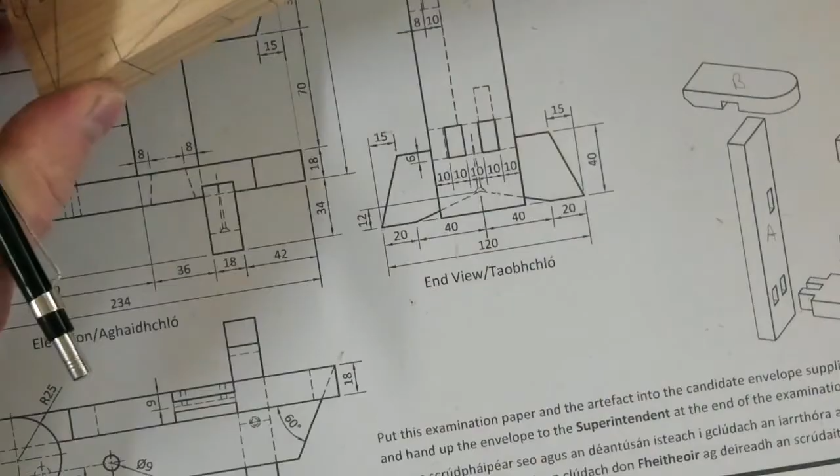And this is waste. Okay, there's a hole that goes in the bottom. You can mark that when I'm doing it. Otherwise, that's finished. So, I've got everything marked out now. I've got that guy, got F, D, A, B, C, and part E.

Okay, all marked out. I'm ready to start cutting. Now, I spent an hour and 6 minutes doing this. Probably would have got it done in 50-ish, 55 minutes. You have to be aiming to not spend anywhere over 1 hour marking out. If you do, there's a good chance you'll run out of time. Okay, have fun.